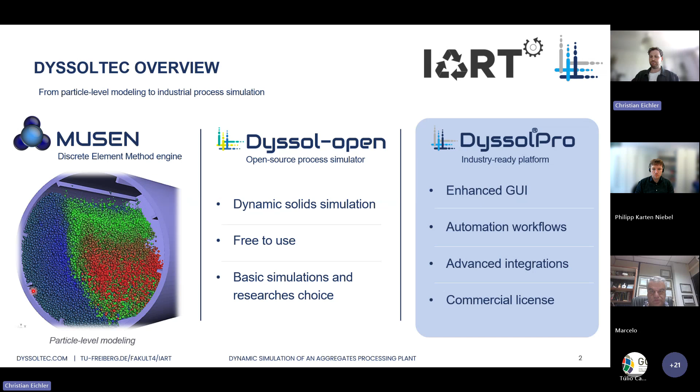DyssolPro comes with three key features, I would say. One is the model development kit, which allows users to develop their own models and bring the physics or machine learning trained models into Dyssol, in either C++ or, the new feature, in Python as well, which is very beneficial in terms of machine learning, since most of those models were trained in Python, and you can easily integrate them into Dyssol now.

Another feature is the calibration tool, where the user provides historical or experimental data, and Dyssol tweaks model parameters to reduce the error between the simulation output and the real data. This is already some sort of optimization, and we can optimize the other way around too, tweaking model parameters like design parameters to optimize a user-defined cost function, like reducing energy consumption or increasing throughput of one product class. We can have constraints, for instance, that the product quality stays within its boundaries. This can be done by optimizing this process, and we have some analysis tools as well.

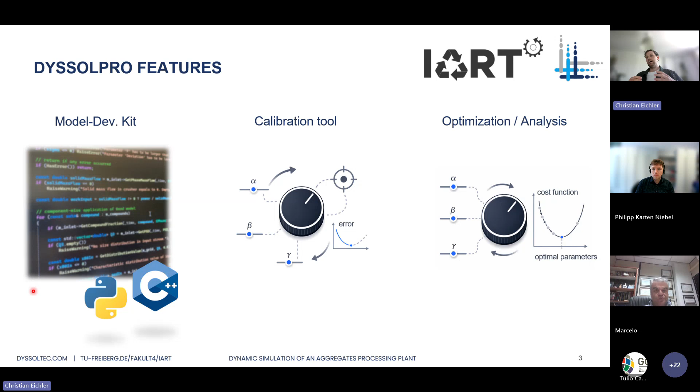Besides those features, we offer also services like reducing the dynamic process simulator environment into a web interface where plant engineers and operators can interact with it, and it's a predefined flow sheet which represents the plant, and it contains the ability to change, for instance, the input size or the input mass flow, and track the material behavior within the process over time in this plant.

This exists already, and the next further integration would be that simulations - so there's a backend behind this website, of course, and we can also connect this backend directly on a historian, and you can see like soft sensor data straight from the historian database, if you want.

Besides that, we have internally developed a pipeline which allows us to rapidly develop, test, and in the end validate models. So whenever clients come to this point of developing their own or integrating their own models, sometimes it's costly when they do it on their own, and we can probably do it faster and therefore cheaper for them.

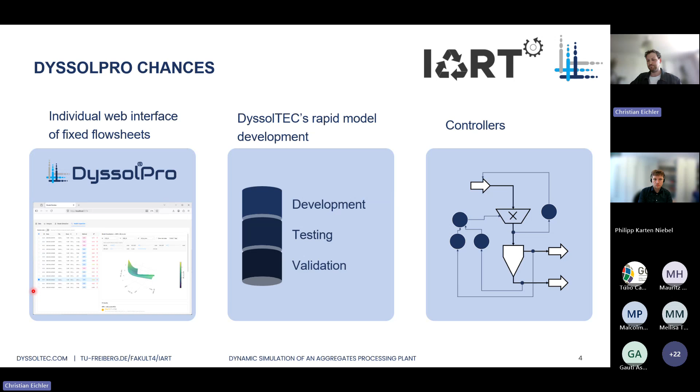And the third point here on this slide I will mainly focus on are the controllers, which are recently integrated in DyssolPro, and you can't find it in our test version which you can download on our website. However, it will be uploaded there soon, so stay tuned, and then you will have these features as well.

Controllers in Dyssol - I'm pretty aware that you already know controllers and control theory. However, I'd like to introduce you to how we can connect them in Dyssol, how we can interact with the flow sheet, and which benefits we have there.

For instance, we can grab information from a unit itself here in a feedback loop over a signal processing unit, which is, for instance, a PID controller or whatever. It manipulates the signal, feeds it into, in this case, a crusher, like a power or a rotational speed. By that, we can build control loops.

We can also grab additional internal variables which are available in these units. Depending on the unit, you can select it.

Of course, we can also have feed-forward loops, thus the signal runs in parallel with the material stream. And one interesting possibility is that we can not only connect to units, we can also connect on inputs. By that, we can control, so to say, the input mass flow or size or phase fractions, etc.

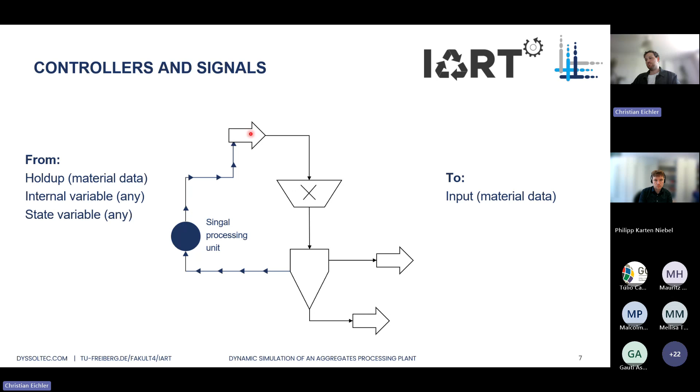Besides grabbing information, so grabbing a signal from a unit, we can also plug in a sensor on a stream and grab the stream data, process them, and feed them somewhere else. So that's what I meant by being creative.

We have implemented a signal generator where you have just any sort of function which is behind that. And for instance, you can put that on an input mass flow, and you can put noise on it or a sine wave function on it.

And by adding fluctuations, you can test the robustness of your process, either running multiple simulations or having a long simulation and seeing how the process interacts with this noise.

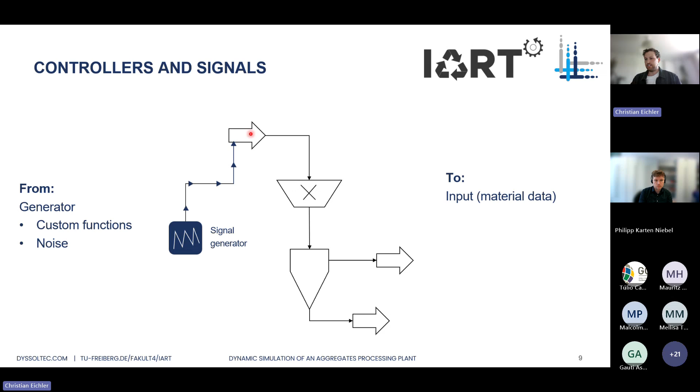And with that, I'd like to show you a brief overview of which models we have, or which signal processing units we have already implemented.

And I have to say, you can connect all these units together and build as complex structures as you want. They're also fully integrated in the model development kit, so you can integrate your own signals or controllers in C++ or in Python units.

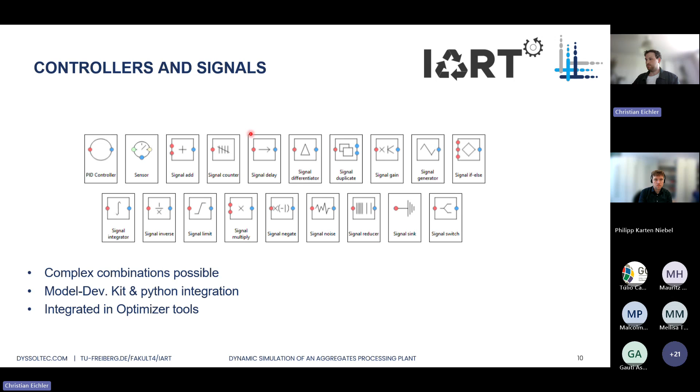And parameters of these controller or manipulating units are also available to be controlled by the optimizer tools which we have. So we can calibrate, for instance, the parameters of controllers when we have experimental or historical data.

With that, I'd like to show you a brief example. Here, a very simple flow sheet - we have a mill, let's say an impact mill, which we are going to control. We are going to control the Sauter mean diameter of the output stream with a PID controller, and we control the power of the mill.

And what we have in general in the process and in the flow sheet simulations, we are actually having time steps in seconds or minutes. Sometimes we have also milliseconds, but most of the time we have really time frames from seconds to minutes.

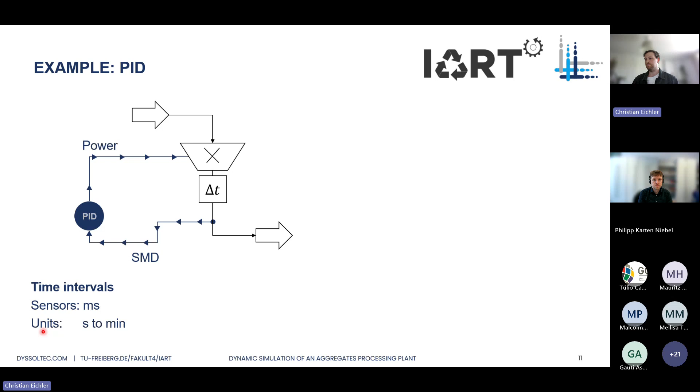However, control loops are usually quite fast, in milliseconds or once per second. We integrated those high calculation rates or high signal rates into the flow sheets in a way that it does not significantly affect the speed of Dyssol. Of course it adds more data and takes a little bit longer to simulate these processes, but we found a clever way to reduce the amount of processing time there.

And now a little example here. You see the Sauter mean diameter in the output stream, and when we set the time delay here, which is probably just a conveyor belt, and the sensor sits at 5 seconds behind the mill, we see we have nice control.

When we increase the time delay, we have some oscillations, and because of that we have to redesign the PID values. This is now something we can do in Dyssol directly, either optimizing the PID values or tweaking it manually, or we can think about adding more complexity to the control, or creating a control loop which integrates this time delay into the loop itself. All this is now possible since we can connect everything together.

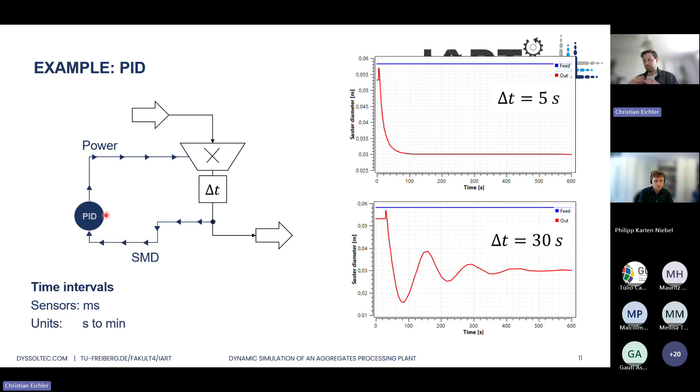Another example, more related to the aggregates, is shown now. Philipp implemented in this project a dump truck, and this dump truck comes with a time-distributed interval and a distributed mass, which it delivers every time.

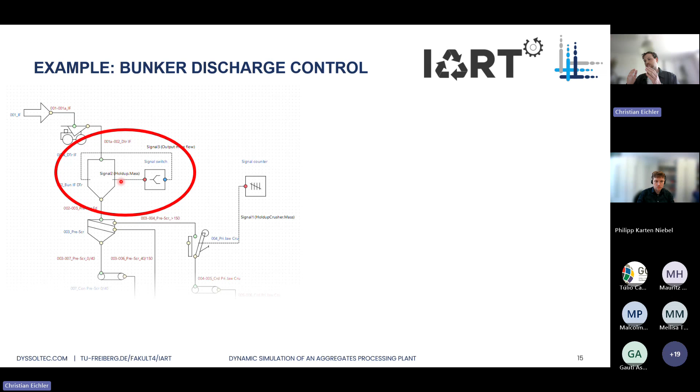This is now something we can benefit from, because we are going to implement a little control loop for this bunker. Depending on the hold up in this bunker, if it's above 50% full, we have the maximum output discharge. If it's below 50%, we set it to a minimum value, which is suitable for the jaw crusher. You see an example here.

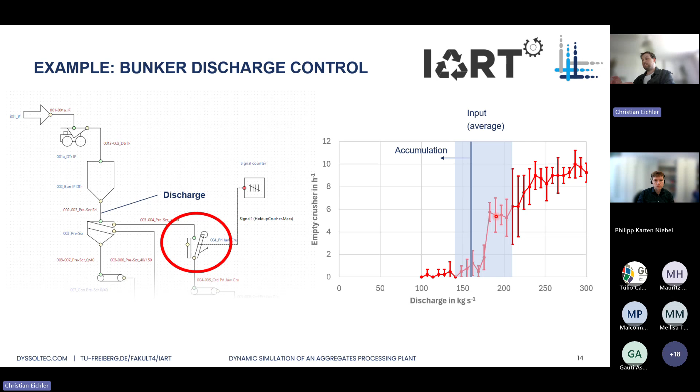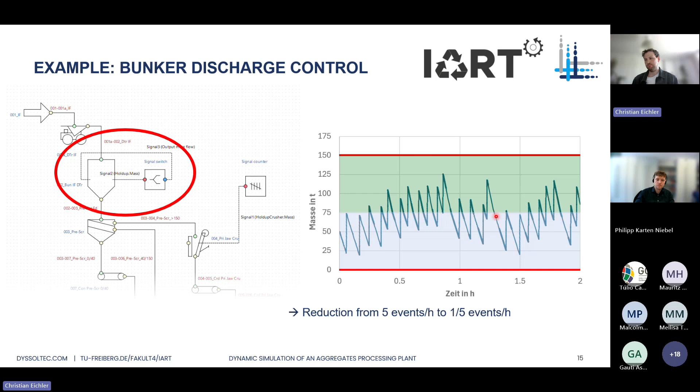I think that's a super simple benefit, or a super good benefit, for just such a small implementation of a crusher and for just a small testing scenario. And that's already the part about the controllers. I think I hand over to Philipp.

So here I have an overview about the new individual models we have created here in Freiberg together with DyssolTEC. Some of you already know. Especially my focus lied on crushers, jaw and cone crushers, but I also implemented, for example, a new unit for impact crushers.

We wanted it to be a benefit for the utilization of DyssolPro for everything, not only for aggregates, but also for ores, for rocks, for everything.

We have seen the small dump truck unit and the belt conveyor unit and something like a stockpile. This is actually quite easy. It is more or less copy-paste of existing DyssolPro units and adding some code.

And as I already said, I mainly focused on jaw and cone crushers, and this is why I also want to introduce a little bit the new models at first. Then, as I said, at the end I give you some impressions of entire flowsheet simulations.

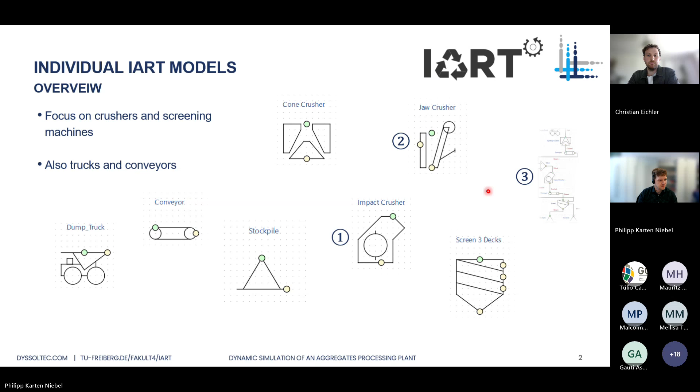For the implementation of a new impact crusher model, I just did a literature research and chose the approach by Nikolov. I adapted it a little bit with knowledge from other literature and also what we teach in our lectures here in Freiberg.

And so the results look quite good. The models need to be calibrated.

Therefore, I would like to remember what Christian said: DyssolPro has a calibration tool. And if the models are calibrated, both the PSD itself and also the qualitative shape of the PSD curves look quite good when you consider the comparison between simulation and experiments.

Here in this example, the impact speed was right. So yeah, this is one example for a new crusher type added in DyssolPro.

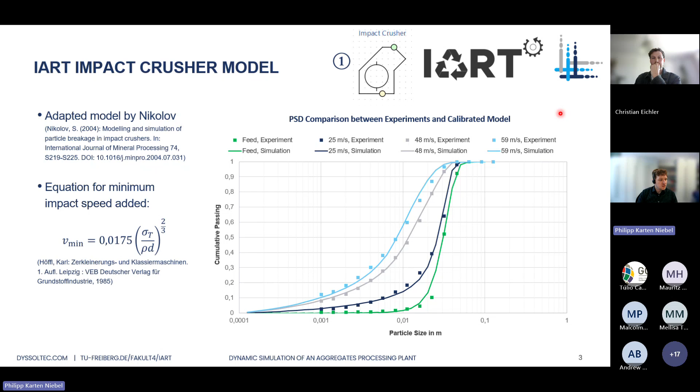As next, I want to come to jaw and cone crushers. There I combined two existing approaches. On the one hand, there was DyssolPro with its population balance approach, working with transformation matrices.

And on the other hand, we all know from literature—most of you should know—that for jaw and cone crushers, a typical simulation approach is a multi-stage approach. It takes into account that the crushing or breakage process is not a single breakage in these crusher types, but a combination of multiple crushing or breakage events.

There's a lot of literature, for example from Chalmers University or also from former IART members. So I combined both approaches, so that we now have this multi-stage simulation approach in DyssolPro.

Of course, the particle size distribution and also the throughput can be predicted. And from my side, I then added some more.

I thought quite intensively about the residence time of the material in the crusher, considering it an important aspect of crushing and screening circuit simulation. I also developed some equations to predict the force distribution in the crushing chamber. Later I will show you an example.

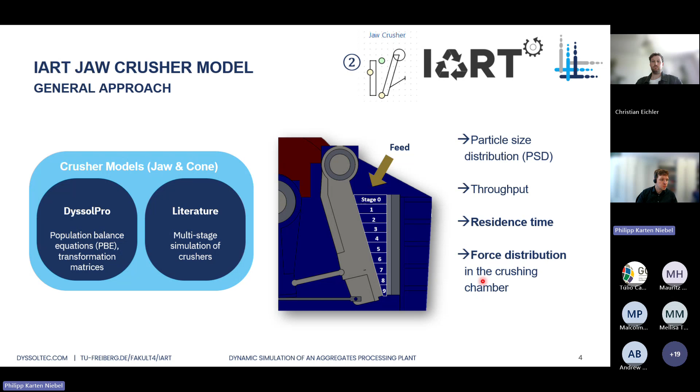Here you can see the setup of the new jaw and cone crusher model—here, for example, of a jaw crusher. It's very typical and nothing too much new.

There is a transport model or transport function dividing the crushing chamber into the crushing stages. And then within each crushing stage, there is this algorithm.

Everything was chosen from literature, but I felt free to mix it a little bit how I consider it fitting perfectly to aggregate plants. So I chose the setup in each crushing stage by Silbermann.

So at first there is a selection function consisting of stress and breakage probability. After that there is a breakage function, and it is bypassed by the material stream which was not selected. And at the end there is a classification function.

It takes into account that even if the material stream passes the breakage function, there could be particles which are too big to enter the next stage and to move down in the crusher.

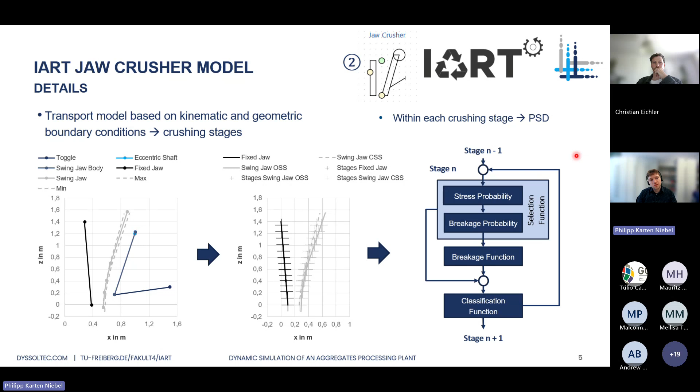Yes, this is the principal setup. I already told you that I also thought about the residence time. So I want to talk about this now—how I implemented residence time calculation in the DyssolPro crusher unit, the jaw crusher or cone crusher unit.

At first I want to say that for somebody interested more in the residence time, I don't want to tell too much here because this is the main topic of my IMPC contribution this year. But I want to show you how the jaw crusher unit works, which I have written.

So I added hold-ups. Hold-up is, I don't know if it's a well-known word, but in Dyssol it's used for the amount of material which is within a unit at a given point in time. So it has the unit of mass, kilogram for example, and I inserted two in the crusher.

The first one is a build-up hold-up. It takes into account that it's possible that the crusher is overfed, and so there's material which is already in the crusher, but it's not crushed. And then there's a second hold-up representing the crushing process itself.

And for both hold-ups, I can calculate the components of the residence time. So how long the material stream or the material needs to pass these hold-ups. And if I add this together, it is included as a time delay directly in the crushing unit. I can calculate the residence time.

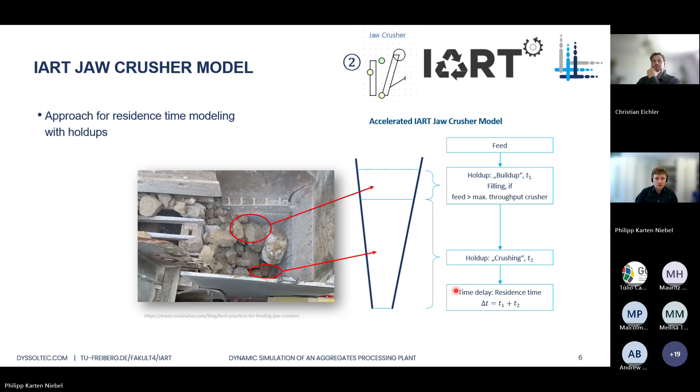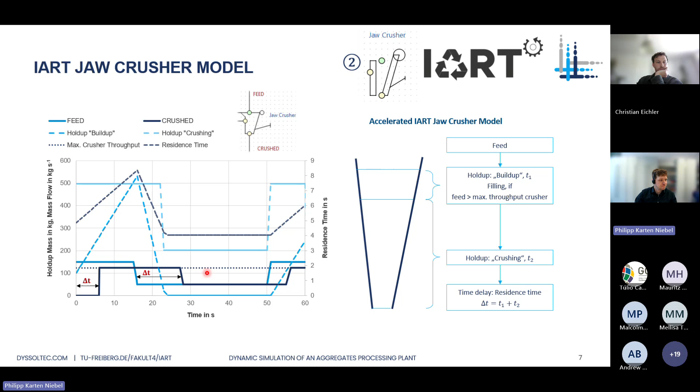As next step, I would like to introduce you to the force distribution calculation in the crushing chamber. For me as a mechanical engineer, to be honest, it's a little bit my favorite aspect of the modeling.

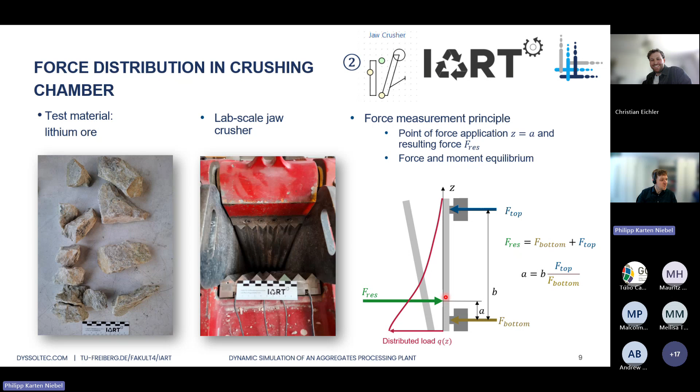So I have something more like PSD or throughput or anything.

The parameter KS is the selection parameter, and it also makes sense. If it is lower, the probability that the particle is selected for breakage is higher, and so we have a higher force and a bigger force because the particles are selected for breakage in upper parts of the crusher.

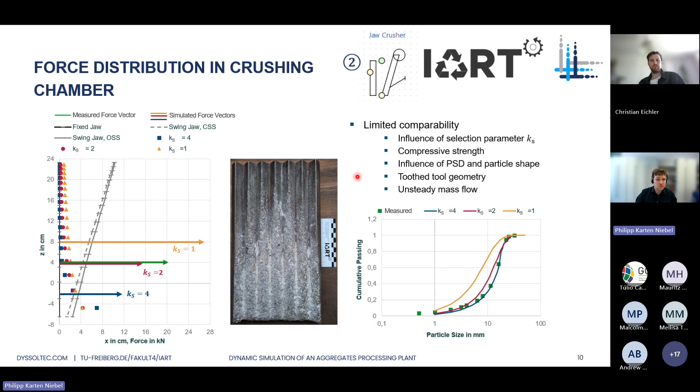Okay, so far so good. Now I will change to the second part, to the simulation examples.

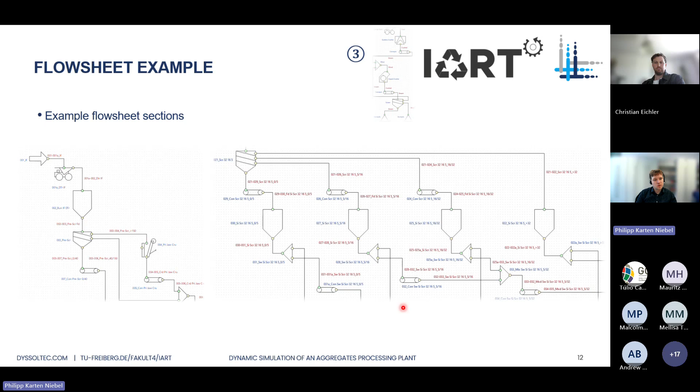This is also what the first simulation example is about. This is a simulation of the entire flow sheet. Please do not think too much about the values of the mass streams and masses themselves. I just want to demonstrate that it works very well to simulate with DyssolPro the entire flow sheet over a long period of time. Maybe, okay, it's not the longest time, but in this case, we talk about 2 hours.

And all of this is at the moment without the control structures Christian introduced you to. So if you combine this, there are a lot of possibilities to optimize controllers, machines, processes, everything you can imagine.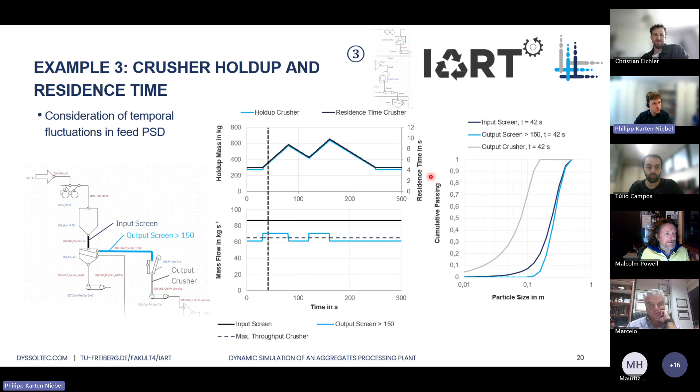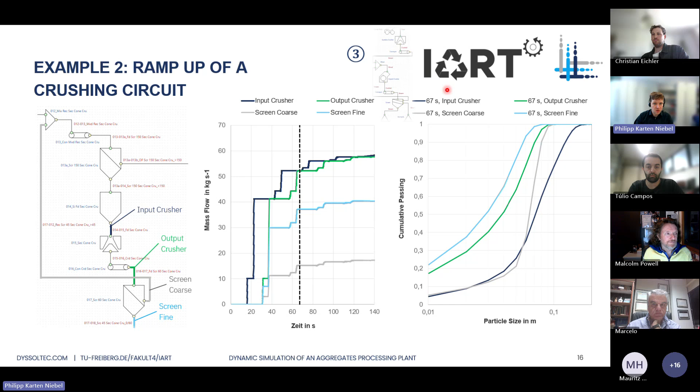Yes, it always depends on the models. Sorry, Philipp ran the simulations, but Philipp, continue. Yeah, sorry, no, I will switch back to the slide. The simulations on my standard office PC are faster than the simulated time, but it still took a while. I think here I simulated 2 hours with this approximately 90-unit flowsheet, and it took, I think, about 75 minutes or so. So it is faster than reality.

Yes, the question is if it needs to be faster than reality. Yeah, it depends on the models. When doing dynamic simulations, it's always looping over looping, and it takes a while for us. However, we can speed up units by building surrogate models, just data-based models. This is commonly used by us, and to be honest, this is a very huge flowsheet, and I think one of the largest ever simulated in Dyssol. So usually we have smaller flowsheets.

Depending on the scope, of course, we can accelerate it. When it comes to real-time optimization, probably we have to be, I don't know, 100 times faster than real time. But depending on the task, we can work towards that. Sometimes it takes a while when we want full resolution simulations, but still, it's a huge circuit.

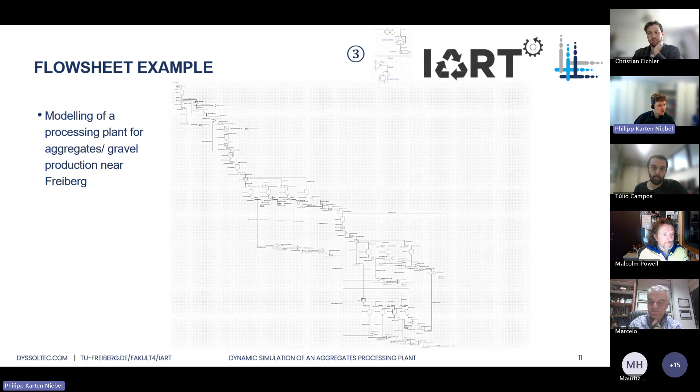I'm a mechanical engineer, so I'm also interested in component, machine, and assembly dimensioning. But of course this approach can also be used to predict the power, which could then be compared to actual power. The origin where I got this method from, or from the literature, is also usually in our lectures we use the force in the crusher to calculate the power.

For the dump truck particle size distribution, all of the simulation examples were more or less symbolic or fictional, so I know we have no real data, but you are right. It could be possible, if we run many simulations, to investigate the impact of fluctuating PSD. The PSD I changed for the simulation is just an example with fictional values.

I have just a quick question. When you mentioned that you focus on force distribution in the crushing chamber, the example you showed was more on compression, meaning the jaw crusher and the cone crusher. I would like to know what is the status regarding impact crushers, such as HSI or others. Could you extend a little bit on that?